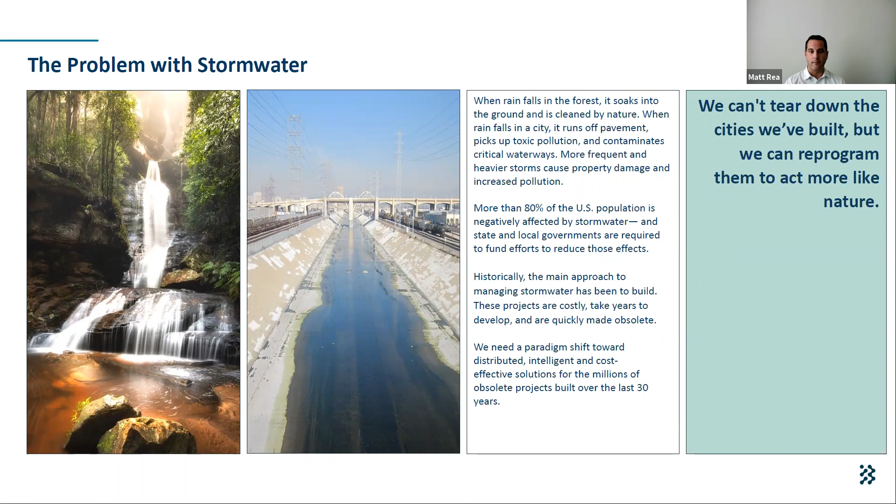We know this is a massive infrastructure problem in the United States. It's estimated that there's about 150 billion needed to upgrade stormwater infrastructure, and our cost of flooding and other water quality goals keeps going up every year. 75 billion is the newest estimate of what stormwater flooding is costing the United States annually.

This joint venture and initiative that I've helped form with the Nature Conservancy brings the conservation power and lead of TNC together with the technology innovation that Opti has developed, to create a venture called Brightstorm, which we've just launched within the last 6 months, bringing financing, project development, and delivery expertise to leverage both the technology and the conservation outcomes, showing the benefits I'll talk about in my slides.

A little bit about the actual solution we're talking about today, which is Opti's software technology. Opti, as a software provider, created a patented algorithm using predictive analytics and field data from weather forecasting, ingesting from NOAA and other sources, coupled with data from sensors placed in facilities throughout a watershed, and a control panel that uses telemetry to connect to the cloud, knowing what is happening within a facility at every given moment and what's going to happen with weather forecasting, with in-the-cloud hydraulic modeling and algorithms running to determine the best case scenario for how that facility should respond to upcoming rain events.

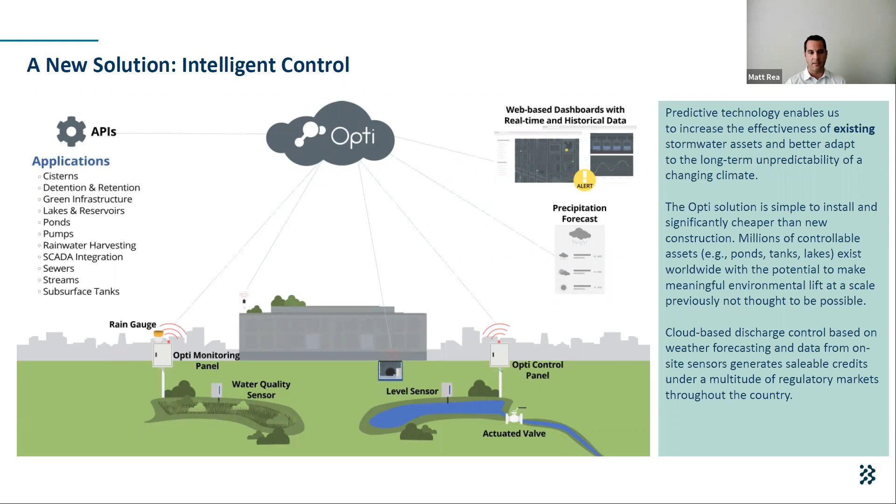Where the innovation, where this idea for Brightstorm came about, is that there are a lot of these facilities that exist in the world. There are millions of stormwater ponds and impoundments in this country. And there's a lot of regulatory demand to do water quality projects, reuse projects, or any type of project that requires a new BMP, or is driven by a TMDL or other regulatory driver.

So where Brightstorm comes in is as this development entity, we can integrate the supply, because the majority of that supply is on private land -- up to 85 to 95%, depending on your geography, of all these stormwater ponds are owned privately. So how do we get results and projects from that private sector side to the regulatory side that needs that benefit under a permit program? That's where Brightstorm was developed, to provide that single source of financing, design, build, maintenance, and operation. I'll talk a little bit about how we actually do that.

And then kind of how this translates into the greater market, which is we have offtake agents where state agencies, DOTs, municipalities, utilities all have obligations where they can take the resultant benefit from a private pond retrofit, for instance, and meet those compliance obligations. And then there's also corporations that have internal ESG goals that can offset obligations by leveraging this kind of model of private to public or private to third party development.

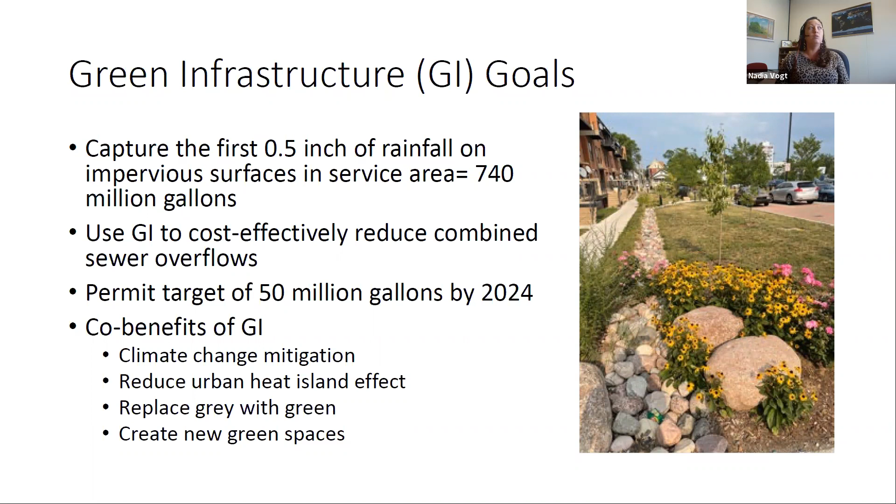Next. So we have challenges, and those challenges are providing opportunities. And our biggest challenge is based on the goals that I identified. We really lack an internal capacity to scale up our work to reach those goals. We would have to double, triple our staff that we have to really reach those goals.

And so what we've decided to do is create two innovative funding strategies that really look at how we can leverage external support, external need through stormwater management plans, and external capacity to scale up green infrastructure. So I'm going to talk through both of those today.

Next. And the first program is our Fresh Coast Protection Partnership Program. And this is a P3 approach that we are currently in phase 1 of. So this is a public-private partnership. And what this approach does is allows for a new level of strategic project direction. Because what we're able to do with this type of a P3 approach is really engage the private sector to do a lot of the work, but with a ton more flexibility than what we have under our utility.

So they offer not only different insights, but again, that flexibility, and you'll see some of that in being able to offer like maintenance services. But they also have an incentive to perform. So it is not just trying to meet a stormwater management goal, but they have a fiscal incentive to perform. And so that really helps the P3 approach because we want gallons and they want money, which works well for all of us.

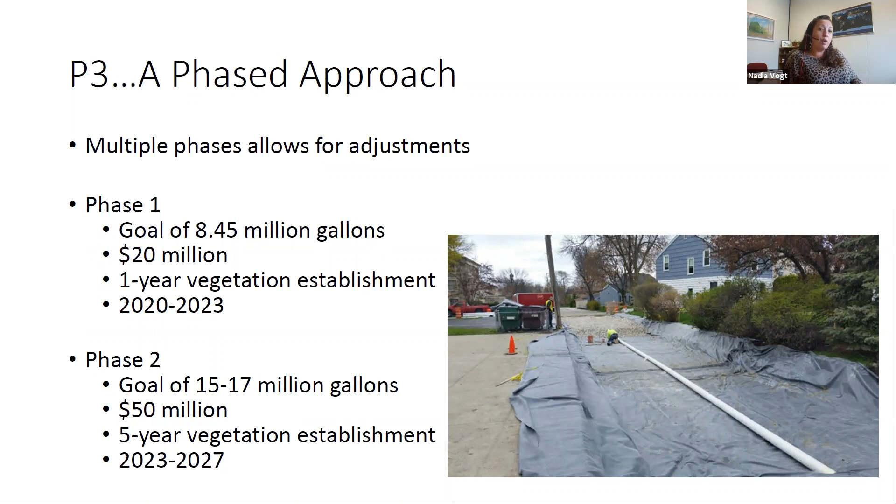We're working on phase 2 now in the RFP for that. We are doubling our goal to between 15 and 17 million gallons for 50 million over a contract of 2023 to 2027. This year, one thing we're realizing is that we want a 5-year vegetation establishment. And one of the reasons for increasing that vegetation establishment period is because within a capital investment in the program, we really can reduce our O&M on the backside. Next.

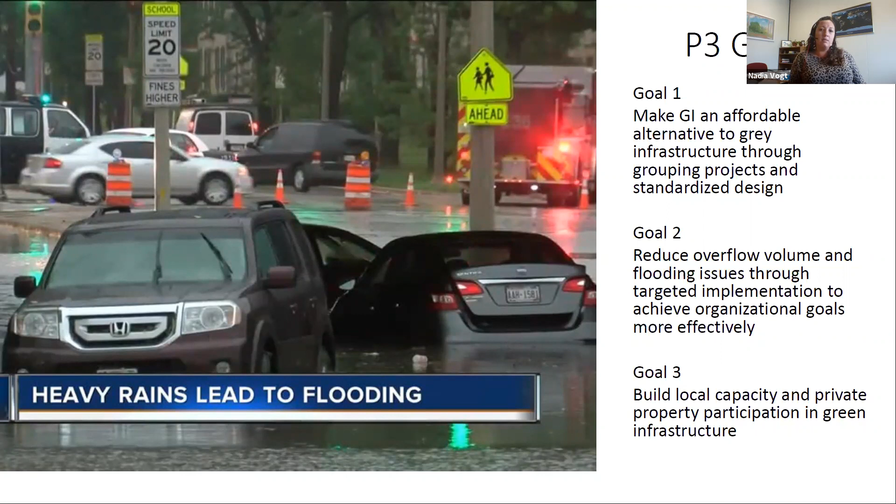So the goals of the P3 are to make green infrastructure an affordable alternative to gray infrastructure through grouping projects and standardizing designs. We want to reduce the overflow volume and flooding issues through targeted implementation to achieve our organizational goals more effectively. And that really couples and complements the next program I'm going to talk about. And then we want to build local capacity and private property participation in green infrastructure so that the onus isn't just on municipalities. Next.

So our takeaways from this P3 are there definitely were challenges. So one of the challenges was creating the process for roles and responsibilities, sharing information, decision making. We really had to trust the private partner to make the right decisions for the program and for the long-term goal. And it's a consistent challenge to make sure that the design standards are met. So making sure we're not allowed to do detention basins. And so you can't do a detention basin and put plants in it perhaps and then call it a rain garden. Our wins are we have a really solid project framework for projects moving forward, especially for phase 2. Next.

The second innovative funding strategy that we're implementing is really with incentive funding. So we have 3 different programs that focus on municipalities as our green solutions, our public and private not-for-profit organizations, and this is more of like a grant program through our Green Infrastructure Partnership Program, and then our Green Schools programs, and that's really focused on schools. And what these incentive funding programs do is they target those different stakeholders through different strategies and are saying, we know that you need to achieve these things and we want these things, so how can we help support you? And so we have tailored all of these programs to really help meet the needs of each of these different stakeholders over the times that the programs have been developed. Next.

So the goals of our incentive funding programs are the municipal funding program and the grant funding program to private, public, and non-profit programs. It's a match program. So really we want them to have skin in the game. This is not just free money. They want to meet an objective and so do we, but creating a strategy where they actually have to participate fiscally has really been helpful for us.

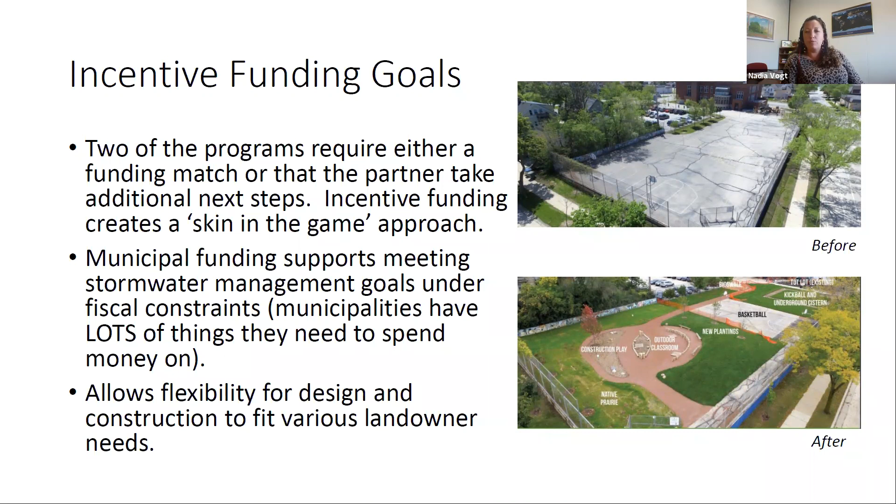So some of our takeaways, the challenges for some of these programs are municipalities and partners are all at different places in their ability to identify and design GI. For maintenance, there's consistently a lack of budget, a lack of capacity or skills to do the work. And we're really looking for more regulatory support for requirements of inspections and follow-up to make sure that the investments in green infrastructure are being maintained from a regulatory component.

Our wins are we've developed a ton of great relationships. We're helping partners and ourselves meet our goals. We're getting a lot of gallons in the ground. And really, MMSD is trying to take the brunt of the learning curve for these programs to try to make it easier for partners. So we've developed O&M manuals. We've developed sizing and plant selection tools. We're developing research for performance of green infrastructure. And we're looking at real-time monitoring to help be able to tailor, similar to the previous presenter, how we can really target the need for O&M versus just a shotgun approach. Next.

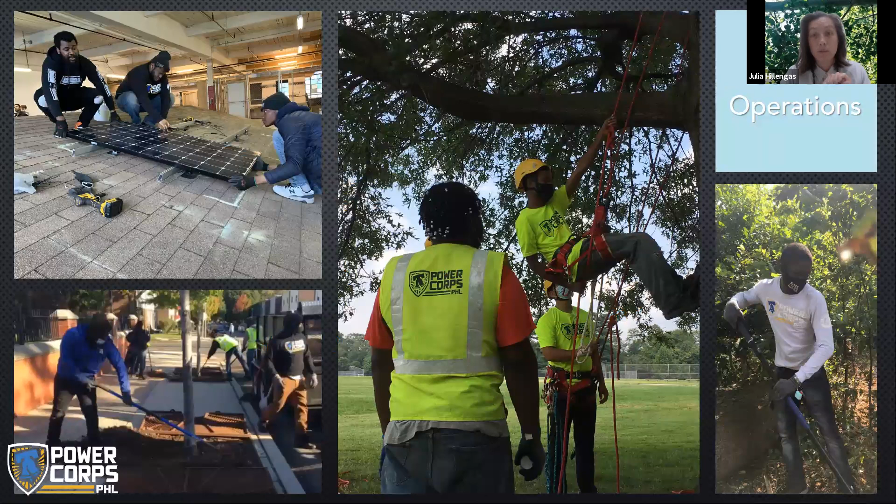Actually, we'll start in 2011. The city of Philadelphia implemented something called Green City Clean Waters, our 25-year plan to mitigate stormwater pollution through green infrastructure. Within 2 years, obviously they learned what everyone else on this call learns: you can put them all in, and then what do you do with them? Because you need to maintain them. In 2013, so 2 years later, right when they were starting to construct the first set of GI around the city, I founded PowerCorps PHL as a city initiative with multiple nonprofit partners.

Our goals were to, one, support the city's ambitious climate resiliency goals, which include Green City Clean Waters, as well as some goals around air pollution and heat island effect. At the time, Philadelphia was still coming out of the Great Recession. It was still suffering from that. So we had high levels of youth unemployment, and correlated to that, high levels of violence in the same demographic. And so we were tasked with creating a solution to meet all those social impact goals and leverage a diverse set of funding to do it.

So Philadelphia is the poorest big city in the nation. And so there's definitely municipal investment, but we need to leverage other money to make it all happen. So what you're seeing now is, fast forward to 2021, we now run what we call industry academies in several industries in clean energy and green infrastructure. So green infrastructure maintenance, urban forestry, solar electrical, and we also do a couple other things that are in the works.

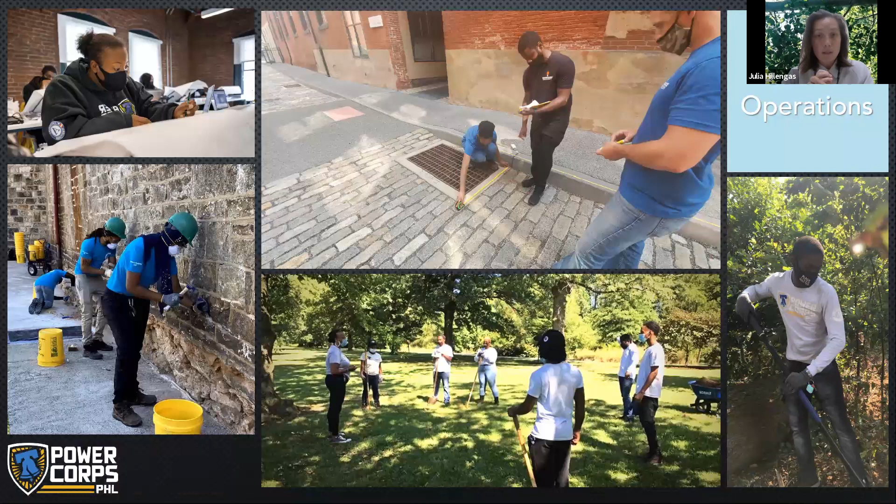You can go to the next slide. And so one of those includes working with engineering firms to co-design what inspections of those green infrastructure sites are. So it's surface maintenance, subsurface maintenance, but also once they go in, you need those inspectors. When more construction happens, you need those inspectors. And so we've been working with industry to identify, I think the last speaker talked about, there's a lack of skills and capacity for folks who know how to do this work.

We've been working directly with the industry and with our utility to understand where's the gap in the talent, where's the holdup in the construction and maintenance process, and then how do we train people who are unemployed or underemployed in those skills to fill those positions that are vacant. Can go to the next slide. So this is, at a glimpse, what we do: we, as the nonprofit provider, take charge of all the recruitment.

So we're specifically aiming for young people who are unemployed and underemployed from 18 to 30 years old. For us, that's the overlapping segment of folks who have a disproportionate rate of unemployment and disproportionate rate of involvement in the court system and involvement with sort of public benefits, that should be starting their careers instead of sort of being stagnant.

We then run something we call Foundations, which is their baseline work readiness. They're doing it on public green space projects. So the city and residents of the city are getting an immediate benefit, and the young people are getting paid training to take care of lots of maintenance projects in our parks and also in our green infrastructure. Through that, they're exploring their career options, and then they choose into much more technical and specific industries like what I rattled off, and you'll see again.

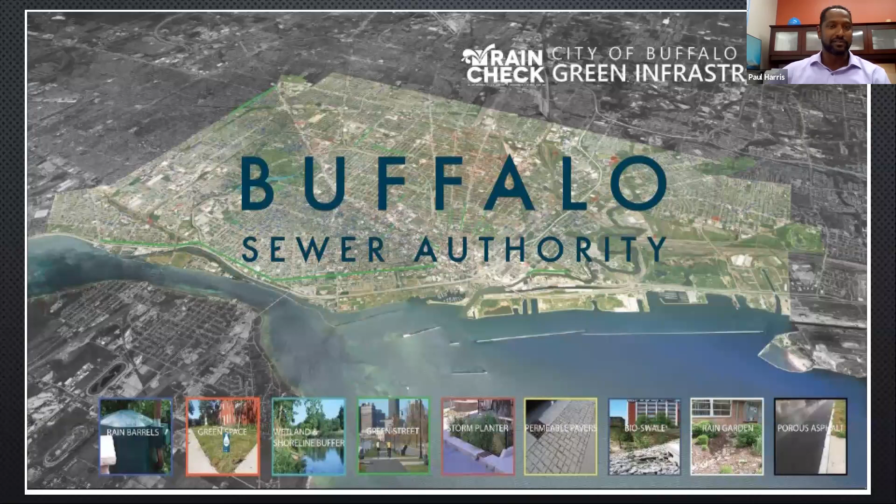Yep, and so Paul will talk a lot about Buffalo, and at the end we'll bring it all home. But about a year ago, Paul and I met and we traded notes on what we've been working on, what we're trying to do next, and we're really excited to be partnering with Paul up in Buffalo. Thanks, Julia. So Julia and I, as she mentioned, met, and it's been great working together with Power Corps to try to implement our local maintenance program for green infrastructure. Before I get into that, I'm going to give a quick overview of the Buffalo Sewer Authority, and then I'll jump into the green infrastructure portion. Next slide, please.

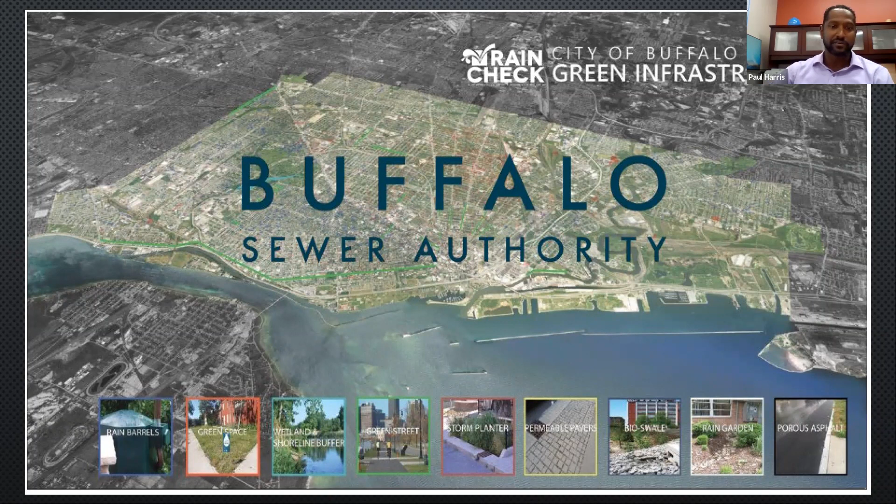So Buffalo Sewer is the second largest water resource recovery facility in New York State. We have the ability to treat up to a maximum of about 560 MGD with an average design of about 180 MGD using secondary treatment. And our facility is basically on an island in between the US and Canada. Next slide, please. We were first established in 1935. We service not only the city of Buffalo, but about 11 surrounding municipalities. We serve roughly over 550,000 people, have over a $50 million operating budget, and on average about 20 million in capital projects. But we are working on some significant infrastructure upgrade programs right now, which are pretty extensive. Next slide, please.

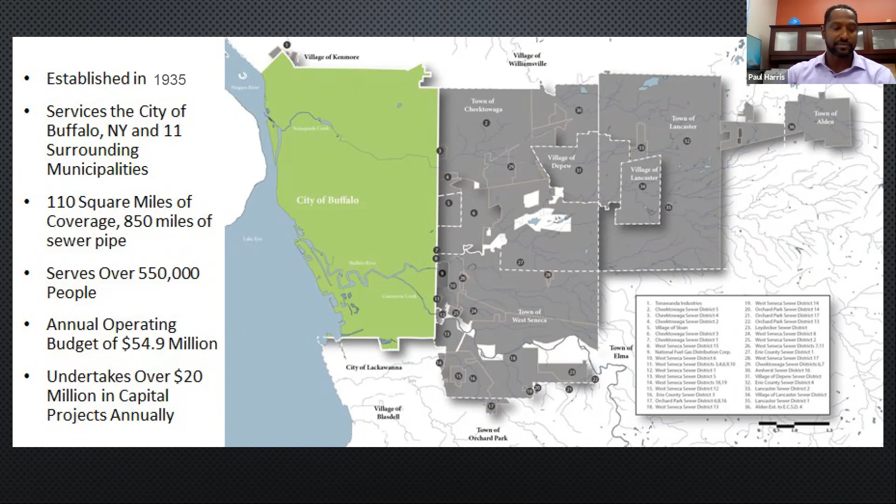So we're working on a long-term control plan. And one of the components of controlling the stormwater runoff is through green infrastructure. What we're trying to do is manage about 1,300 acres of impervious surface area through green infrastructure. In doing that, I was asked to create a green infrastructure maintenance department to maintain these sites and these assets. Currently, there's about 66 acres that have been implemented. We're planning to add an additional 200 acres that need active maintenance.

Right now, we've figured that in order to maintain those 66 acres we need about 16 people. Right now, we have only about 4 or 5 people in our green infrastructure maintenance department. And we're foreseeing that we would need about 50 to 70 people over the next 3 to 5 years as we implement the next groupings of green infrastructure. That is what led to the need to create a pipeline of support for a maintenance department, trying to do so in a way to get skilled labor and folks that are trained and understanding green infrastructure.

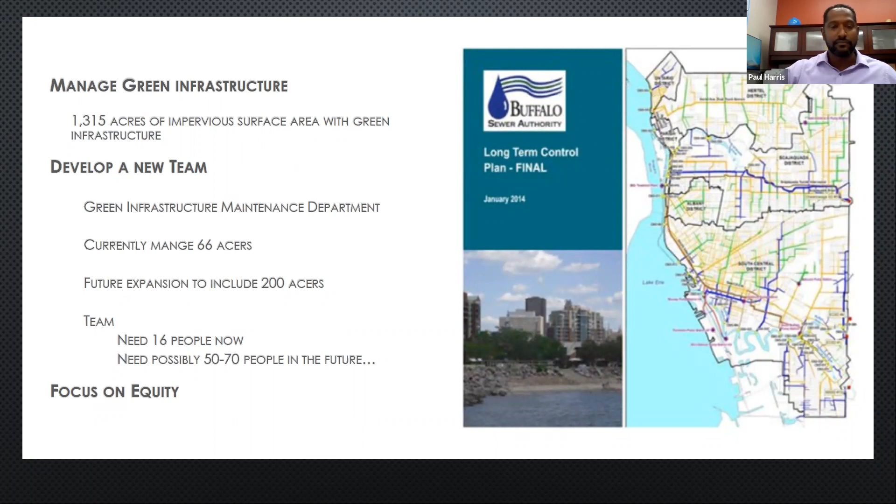But we also wanted to focus on equity. That's a real big part of our focus in what we call a Rain Check program, where we've looked at means of implementing green infrastructure throughout the city, but doing that through the lens of equity. Next slide, please. So what I first did was to work on developing an RFP.

At the end of the day, we wanted to make sure we could bring folks on to help maintain these green infrastructure sites, but we wanted to develop a third party here locally that could take the lead in doing this work and developing folks that can do this type of work, leaving the training and recruiting to them, and then allow us to get the benefit of hiring folks to do the work.

The focus on equity: we've broken up the city into different CSO basin areas, priority basin areas. We wanted to focus on two of those particular basin areas, basin 26 and 53. Looking through the lens of equity, we wanted to look at socioeconomic factors and environmental factors to make sure that's part of the solution in bringing folks in to meet these green infrastructure maintenance needs.

We also wanted to make sure that full wraparound services are being provided, so that folks are not only trained in green infrastructure, but also have any other needs met, like core knowledge needs, work readiness, and social supports.

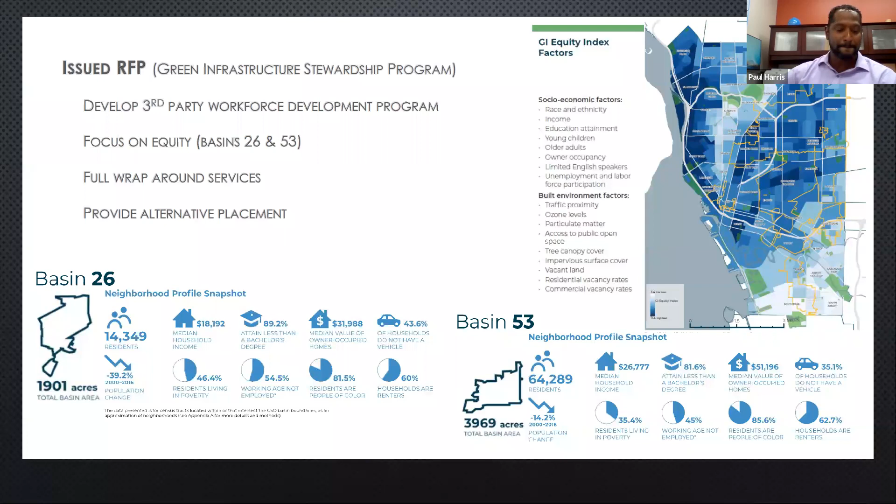So in doing so, working with issuing the RFP, PowerCorps ended up winning the proposal. We've worked with them, and as Julia just mentioned, the program works really well in meeting our BSA rain check equity goals. They've done a great job working with the local community.

A big part of our focus in the RFP was also making sure we're able to develop a third-party local organization to implement a model. So they've trained a local organization called Heart of the City to develop this model. They've gone out and recruited in those critical CSO areas I mentioned previously. Our goal was to get 5 to 6 folks to come in as candidates for this first phase, and they've done so.

They're really working well at addressing pipeline needs. We can tell that recruiting and implementing this model through a third party is really making it easier to build and continue the model. The other benefit is that the program model works well with that seasonal approach I mentioned - we're able to bring folks in, they can work with our teams, and we can go out and maintain or address our green infrastructure sites.

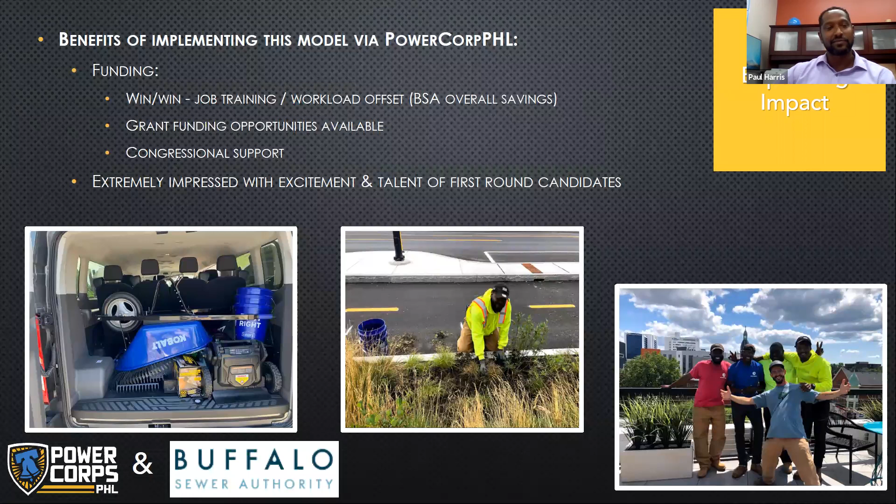And ultimately, you can see from the smiles and just looking at the folks in the photos, we've been really impressed with the talent they've identified locally. And we're really looking forward to bringing on some highly skilled folks as a result. And I think that's it.